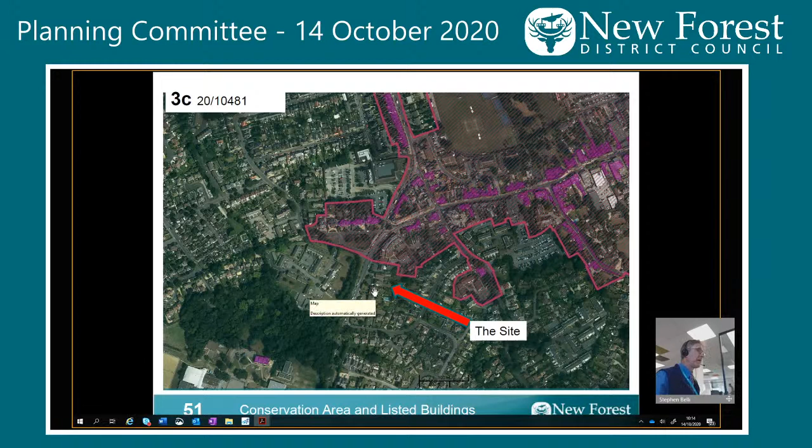This plan shows the footprint of the existing buildings, and superimposed over that footprint is the proposed building block. And as you can see, members, the footprint is significantly larger than anything in this particular area. And Buckler's Court is, as I said, the edge of the conservation area.

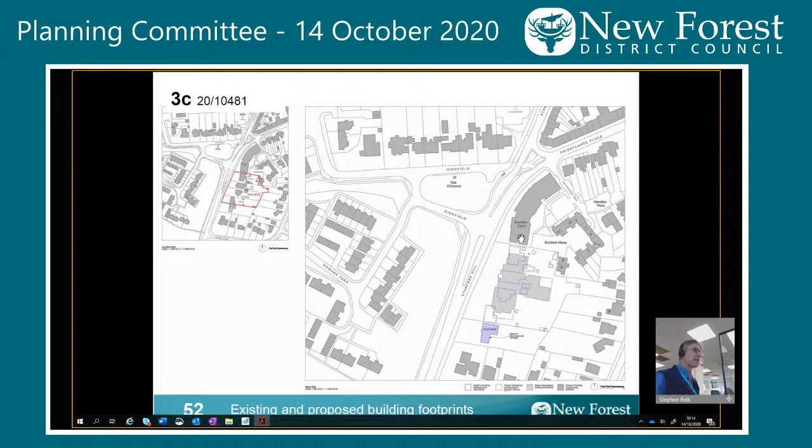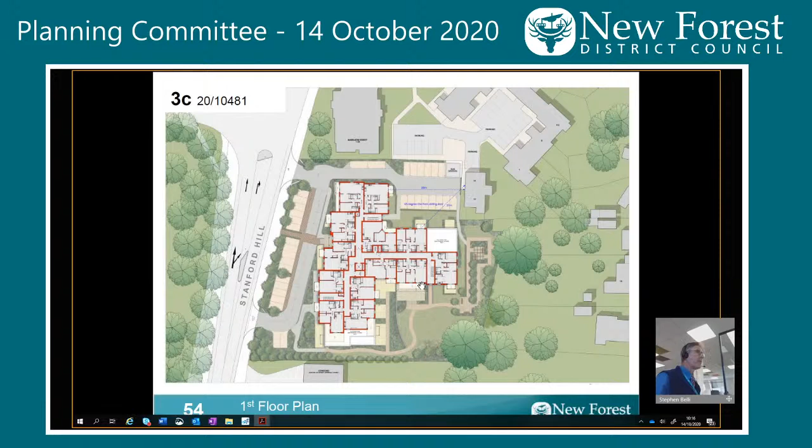The agent has also shown the distances involved in terms of balconies towards Buckler's Mews and that way as well. Second floor plan, and then a lower ground floor plan, because the building is 4-storey in parts, Chairman, as the ground drops away the building increases in height. So it does create 4 storeys in one part of the building, and this is the front section of the building, from Stanford Hill.

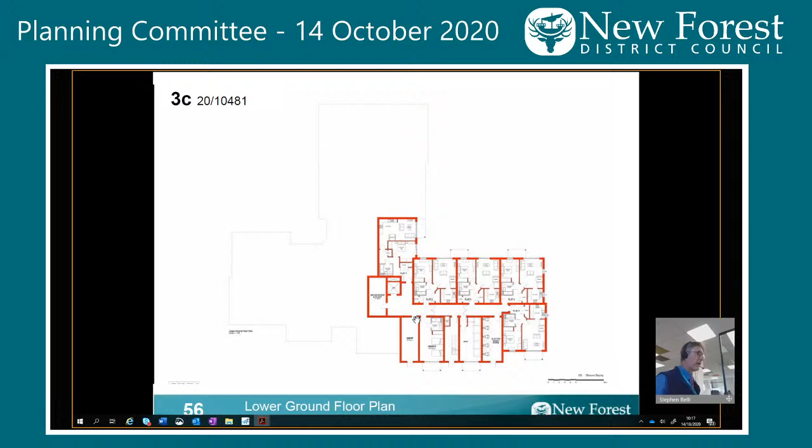These are the proposed elevations. So it's a collection of buildings joined together into one mass, with different textures, different fenestration and roofing details, as you can see there.

That's the view that you'd see from Stanford Hill. This is the view that you would see if you were standing from the south, looking northwards towards the town centre, and Concord is on this side.

You've got a flat roof section of building which has been introduced to reduce the impact on Concord, and then the building rises - this is the 4-storey block that I was talking about. The building extends well back into the site as well, on 3 floors.

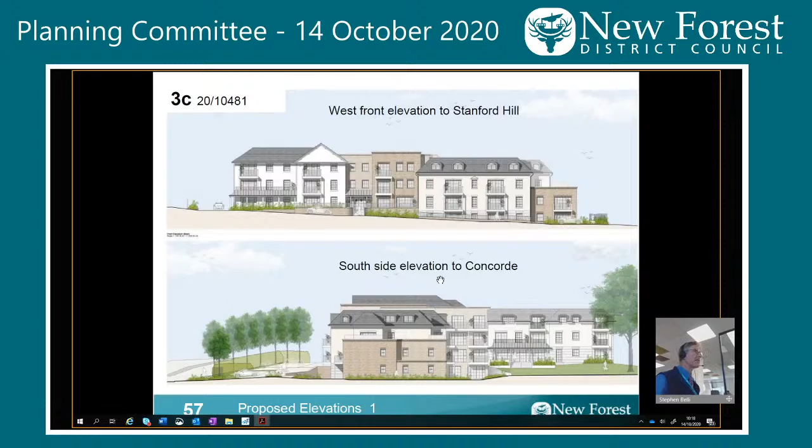This is the next elevation - these are the elevations to Belmore Road. So this is what those residents in Belmore Road will see from their rear gardens. Again you've got the 4-storey element on that side, the 3-storey element on this side, and this is the flat roof section I was referring to a moment ago.

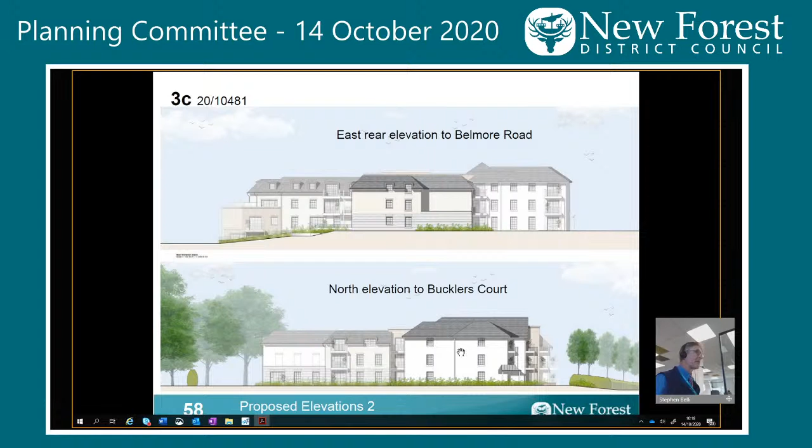So what the applicants have done is reduce the number of units by taking out 2 of these floors, and they've rejigged the units internally, so they've actually lost 1 unit overall from the previous refusal scheme. And that's the elevation to Bucklers Court, looking south.

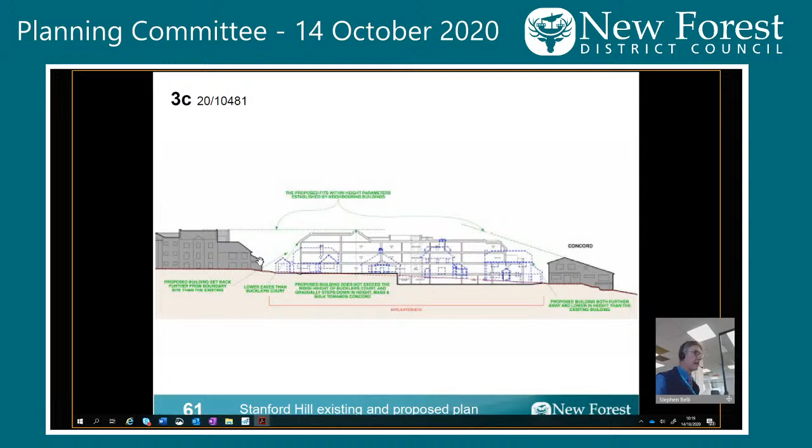So the application is recommended for refusal, Chairman.

There is one item of late correspondence: the applicants have provided us with an updated shadow habitat regs assessment, which was received on the 7th of October.

The reason it's on committee is because our reasons for refusal, set out at the end of this report on page 58 onwards, don't exactly align with the views of the Town Council. The Town Council, for instance, recommend refusal on a number of other matters, such as highway impact, lack of car parking, and over provision of this type of accommodation, and there are a few other areas where we don't exactly align.

The reasons for refusal, Chairman, are on the basis that it doesn't constitute sustainable development, it's not acceptable in design terms in terms of its bulk, mass, height and scale in this location within Lymington, and it's not acceptable in terms of its impact on heritage assets such as listed buildings and conservation areas. It also has an impact on wildlife species within the site, which we're not satisfied has yet been dealt with.

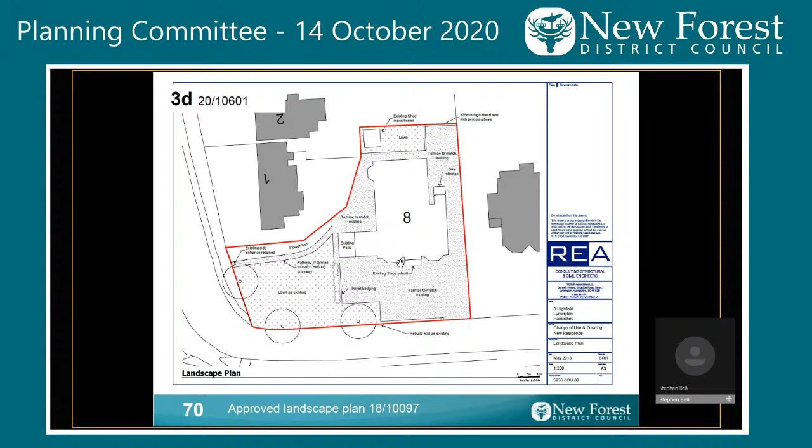So this is the proposed elevation. There's a change with a window being introduced into the front elevation, serving bedroom 3, and some changes to the rear elevation in terms of the door and window. There's also a change in this side elevation facing one of the objectors' properties, but that's an obscure glass window into an ensuite in that location.

So the arrangement now, Chairman, is that instead of being a standard family dwelling, there are three double bedrooms introduced on the ground floor, all with en suites. The garage is to be converted into a storage facility, and the sunroom stays as it was but with accommodation — the occupant of bedroom 6 would be able to access that sunroom and then into the garden. So that's being incorporated into that bedroom accommodation.

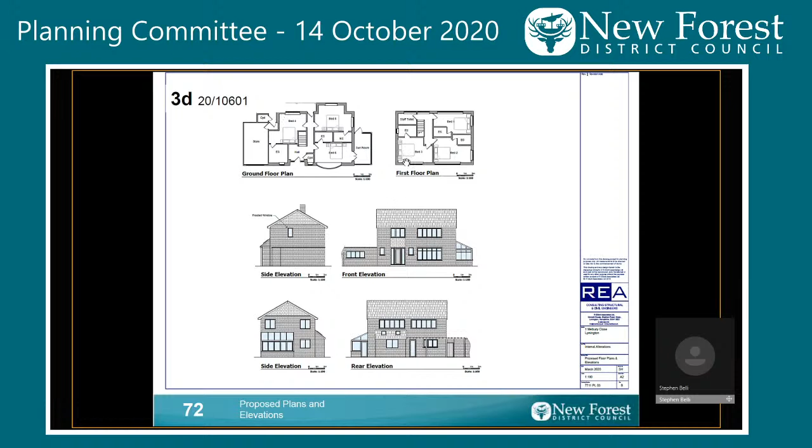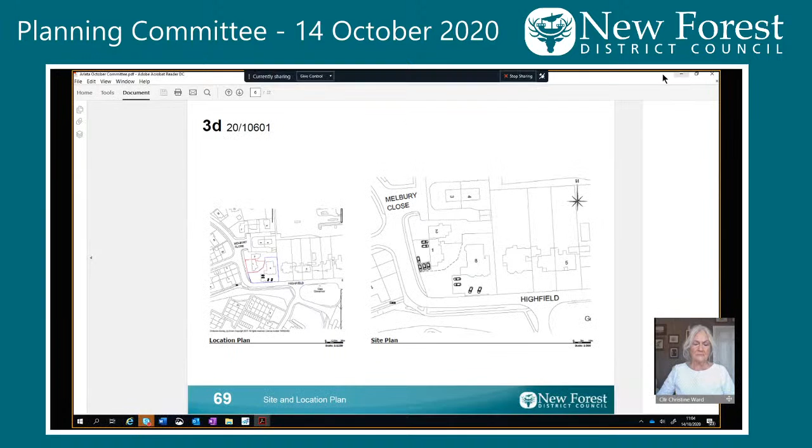Thank you, Madam Chairman. I don't know if this strictly applies, but as this is going to be a B&B development, do these properties both meet the requirements for wheelchair access for B&B type properties?

Normally speaking, Chairman, they would have to meet Part M of the building regulations. I'm not aware that they don't, but that's something that would have to be considered in due course. I think Part M also suggests it's a proportionate use of access for commercial properties. There is no lift with this property, that said, there are 3 bedrooms available on the ground floor, all with level access as far as I'm aware. So it's a proportionate consideration of the needs for people with other needs, and I think there's no sustainable grounds to refuse the application for those reasons.

Thank you very much. Councillor David Hawkins: Yes, seeing as it's going to be a B&B, I would imagine we'd use more energy. Is there any green energy proposed for this site?

Chairman, I would say that's a leap to say it would use more energy, because if it's bed and breakfast, it's likely the people in those properties will not be there all day. They will be out and about enjoying Lymington rather than sitting in their rooms using electricity. So it is a leap to say that, I don't agree with it. The applicants can also make available electric charging points, so I think it's as green as it can be, Chairman, and I don't consider there's any evidence to show the carbon footprint of this new use would be any greater than what's there at the moment.

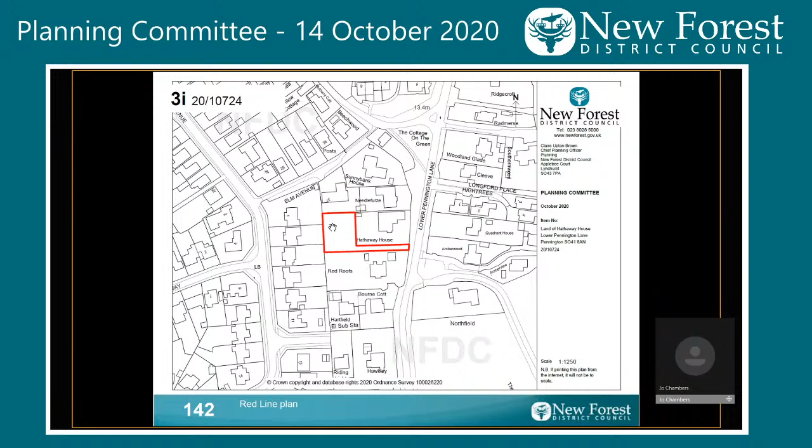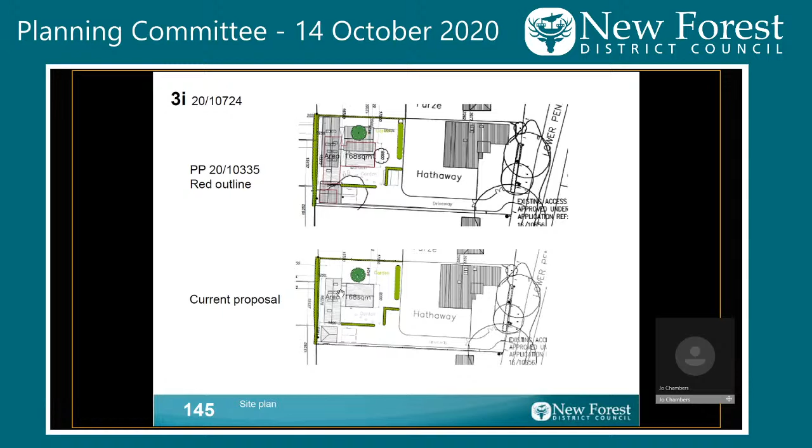So there's an extant planning permission for a new dwelling and garage on this site, which was approved earlier this year. The current application is for a variation of condition regarding the plans. The screen at the moment is showing the extant planning permission, edged in red on the top plan. The current application is the current variation, with an amendment to the garage proposed and an amendment to the design of the kitchen area.

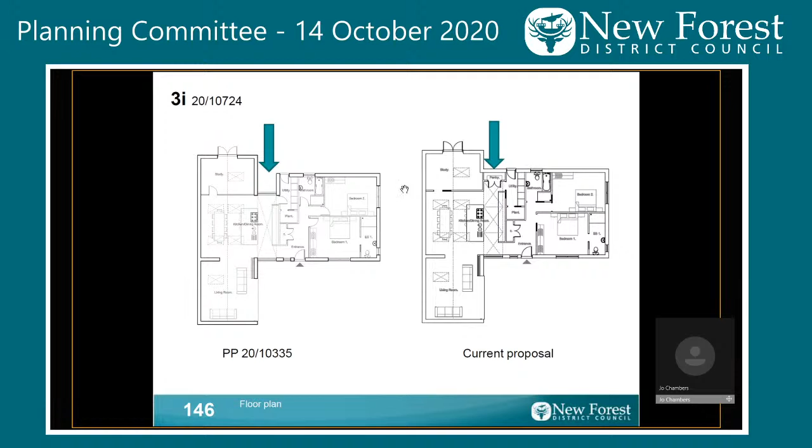If we come on to the detailed layout plans, the proposal is to infill an existing recessed area on the approved scheme, which will allow the creation of a pantry in the kitchen area. The footprint would project no further forward than the existing bedroom wing. In terms of the roof design, the extant permission has a large single glazed section, whereas the current proposal has 3 individual glazed panels with a flat roof over the pantry area.

The roof would be hipped away from the side boundary with red roofs, and would also be hipped away from the new dwelling itself. As regards the rear elevation, the approved scheme has it hipping away from the properties at Newbridge Way. The proposed scheme has it hipping away but also hipping to the sides, to reduce the overall bulk and mass.

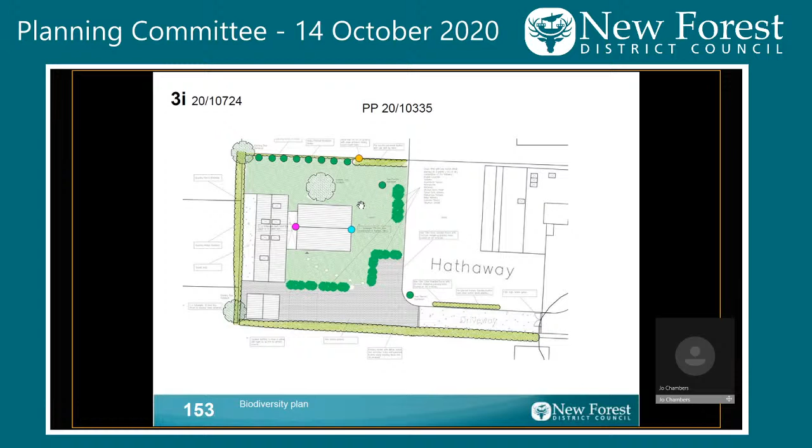The approved scheme has a number of biodiversity improvements, including bat tunnels, swift boxes, and provision for hedgehogs. These have been replicated in the current scheme, and now we have some photos of the site.

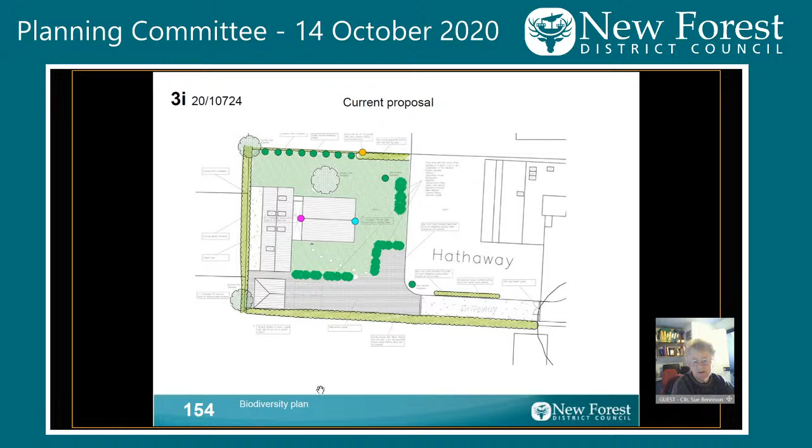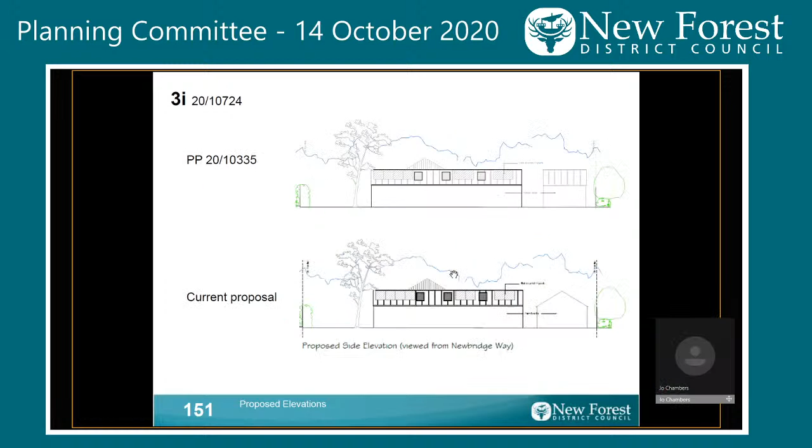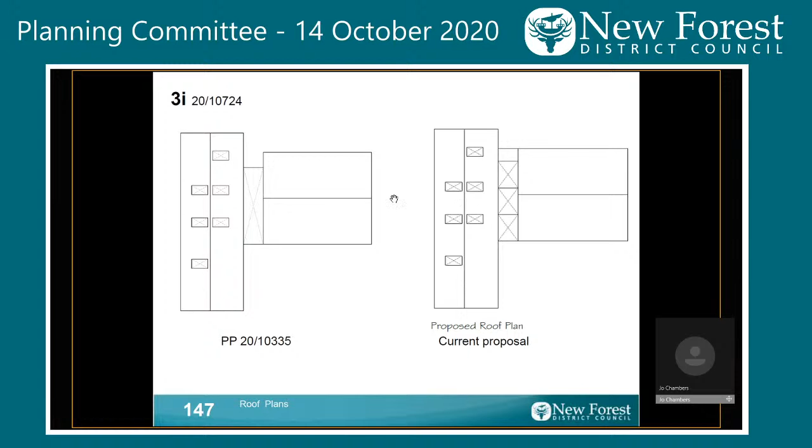If we go onto the roof plans, we can see the Velux windows that were approved in the extant scheme, and they're also approved there. They're also looking to just replicate that. There's been no notification of a change to the roof design. Looking at this plan, I would suggest that it is a CAD error - it's not shown on the detailed design of the roof itself.

So there's no extra window? No, there's nothing in the description. Nothing in the description, nothing in the information that's been put forward, and nothing on the actual roof plan itself. Thank you for that.

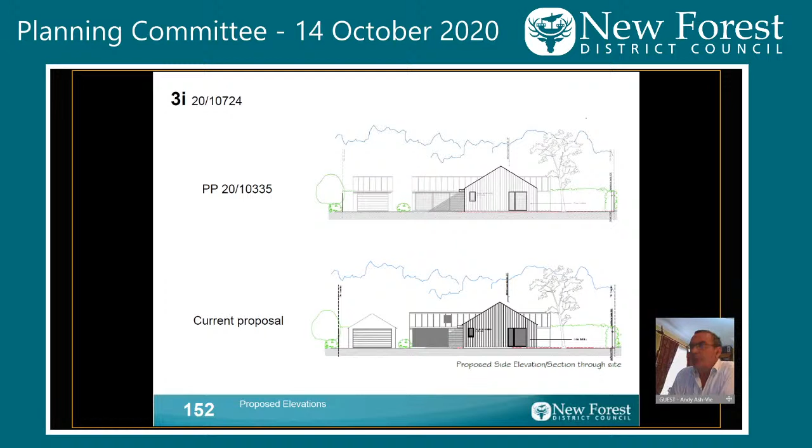When this application came up originally, we were certainly not very much in favour of it, because it was on the very limit of suitability. It was already recognised that it was negatively impacting on neighbouring properties and their amenity, and we think that any further development would definitely be unsympathetic and uncharacteristic. We think that the development is overly dense, cramming a property into a small space, and it is in direct conflict with NFDC's policy CS 2.7.

Thank you. Of course, we have already approved the building, and these are amendments. I accept that point. Before I ask questions, can I go to Claire Upton Brown?

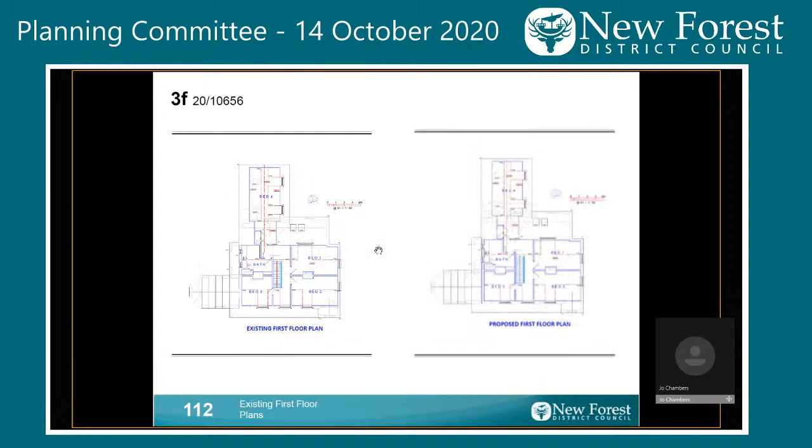Now in the report, under the section on impact on highway safety, it does set out the parking requirements in accordance with our parking guidelines, and although the plan, as you rightly say, shows a number of cars parked on the site, including within the garage, the parking requirement under the guidelines is not for the number of vehicles shown on that site plan. We do not believe the proposal would cause a conflict with the car parking guidelines. We're mindful that Butts Ash Lane itself doesn't have any parking restrictions, so members of the public who have a lawful vehicle are at liberty to park there in accordance with other legislation in the Highway Code. The Highway Authority has also been consulted, and with regard to the level of traffic likely to be generated, the use of this site for a care home for four residents is not considered to generate an amount of traffic or parking significantly different to its use as a 5-bedroom family home. I think that may be a subjective comment, but okay, thank you.

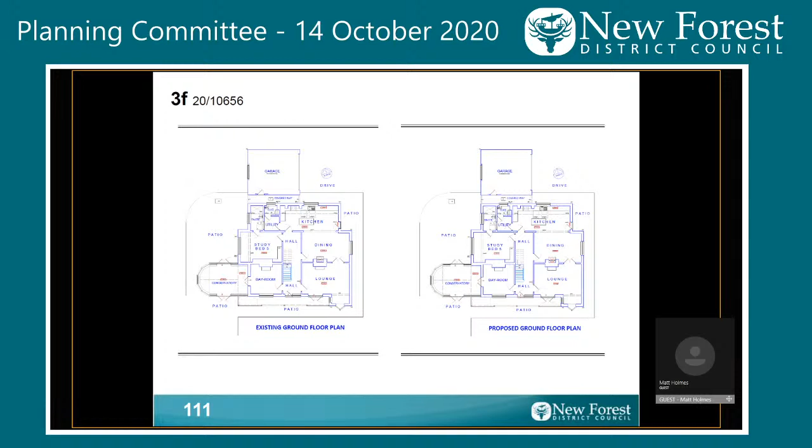Members, there is car parking space on the site for multiple cars, and even if on-street parking were needed, that is unrestricted on this part of Butts Ash Lane. Care accommodation is a residential use, and the site is located in a residential area. The proposed use of the building is therefore in keeping with its surroundings.

As no external alterations to the building are proposed, the change of use also preserves the character and appearance of the area. As already said, a small number of residents of the home will be supported around the clock by care staff, and that should ensure that the amenities of neighbouring properties are not impacted. Finally, your highways officers have raised no objection to the proposals. Accordingly, I commend the proposals to you and would ask that you grant planning permission as set out in your officer's report. Thank you, Madam Chairman.

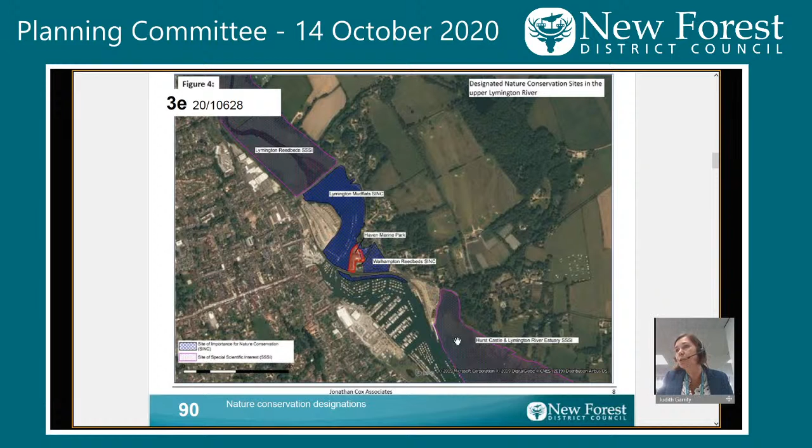This slide shows the site in relation to the SINC and SSSIs. The planning application site is outlined in red. The existing SINC on the site forms part of the Walhampton Reedbeds SINC. The riverland immediately adjacent to the application site forms part of the Lymington Mudflats SINC. To the north and south of the site are SSSIs: Lymington Reed Beds, and Hurst Castle and Lymington River Estuary SSSIs.

Ecological surveys confirm the SINC is now heavily degraded and of low conservation value. Furthermore, the SINC area that remains is isolated from the remainder of the SINC to the south and east of the access road, which limits the opportunities for its restoration as reed beds.

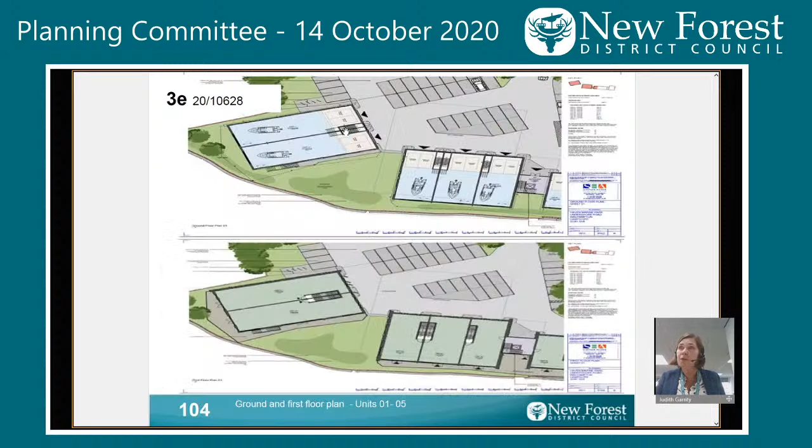I have included at the end of this presentation some plans of the extant elevations just for information. This is Block A, Block B, and also the ground and first floor plans of Units 1 to 5 and Units 6 to 11. The recommendation is to approve the variation subject to conditions, and that's the end of my presentation. Thank you.

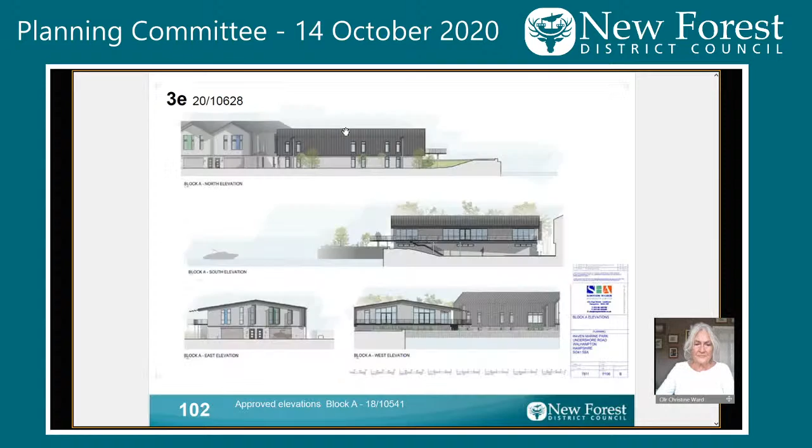Do we have any questions, please, for Judith? Councillor Sue Bennison: Thank you, Chairman.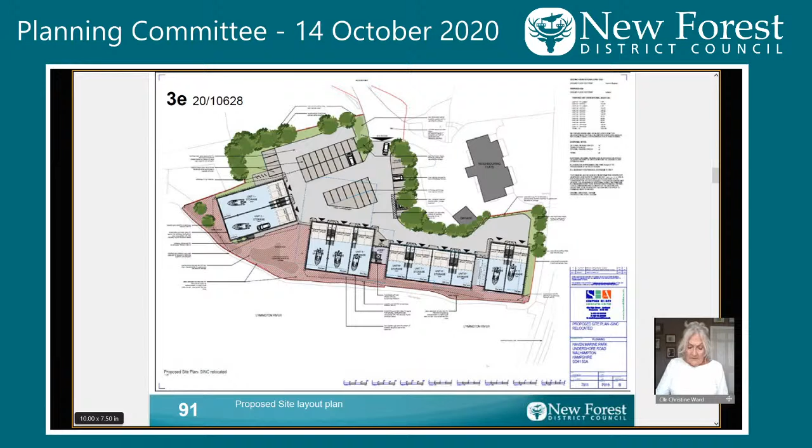Councillor Anne Bellows, for. Sue Benison, for. Hilary Brand, for. Councillor Rebecca Clark, for. Councillor Corbridge, for. Councillor Davies... he's gone, he's gone, right okay. And Councillor Glass, for. Councillor Hawkins... he's left, has he? Oh gosh. Councillor Kangarani, for. Councillor Riley's left, hasn't he? Yes, yes. Councillor Tony Ring, for. Councillor Beverly Thorne, for. Councillor Malcolm Wade, he's left. He's left, okay. And I'm for, so that's unanimous.

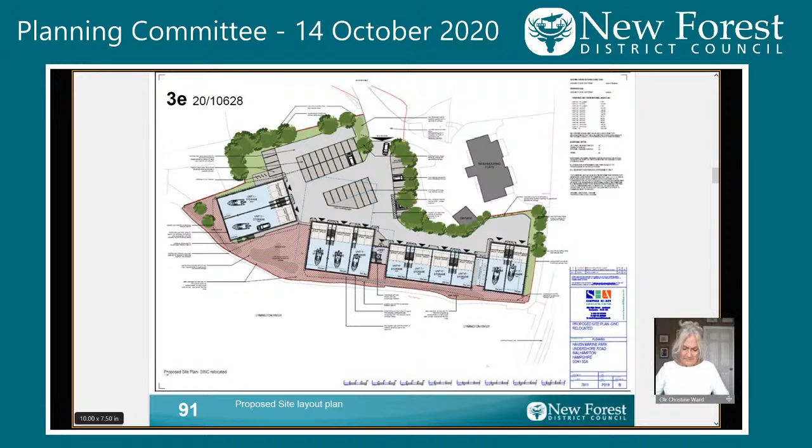Can you confirm that for me, please? Yes, it's unanimous, we've had 10 votes. I hadn't realised that Councillor Davies has left, though. He looks like he's still in the meeting. Can you hear us, Councillor Davies? He must have left, he must have left, okay. So how many more have left? Who have we got here now? Are we still quorum? Do you want to adjourn the meeting for a moment? Yes, can we adjourn, please, for 5 minutes?

Members, we are commencing the meeting again, and we're going back to application 20/10433. The recommendation is to defer, but we do have a speaker that wishes to speak. Democratic Services, can you confirm which speaker that is? We've got Mrs. Chown. Can we go ahead then with Mrs. Chown, please? If she's there, you have 3 minutes to speak.

I think we're getting Mrs. Chown on the phone, Dean's doing that now. Okay fine, and that's the only one that we have, is it, the only speaker? Chairman, yes, so Matt Holmes was fine with the deferment. Right, okay, fine.